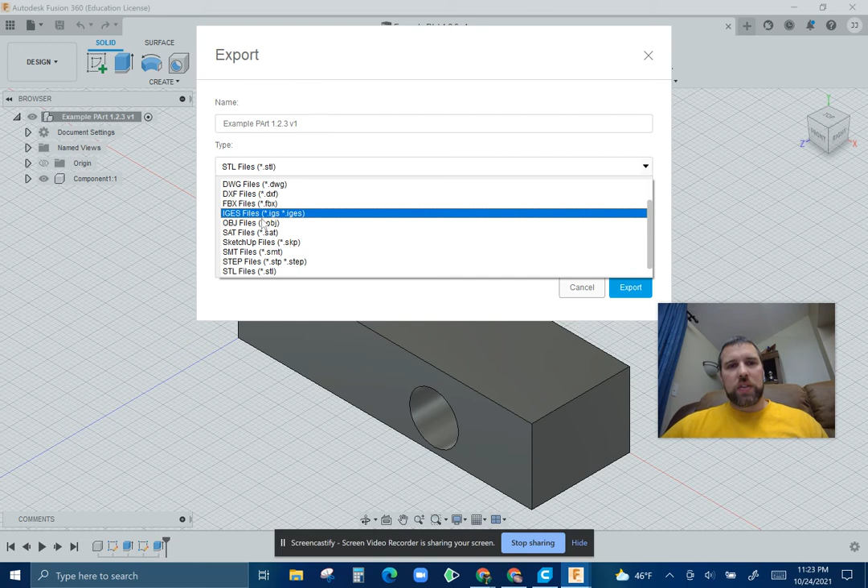So a couple options. You can export as an STL file, stereolithographic file, and that'll send that 3D model to any type of slicer you want. Or you can 3D print the part, basically send it to a 3D printer. And since we have Cura installed on the desktop, I think we can send it straight there.

So either way you do it, it's going to ask me to select the part. This is the part I'm going to select. We're going to export it in millimeters. Refinement is medium, that's fine. And the print utility is Cura.

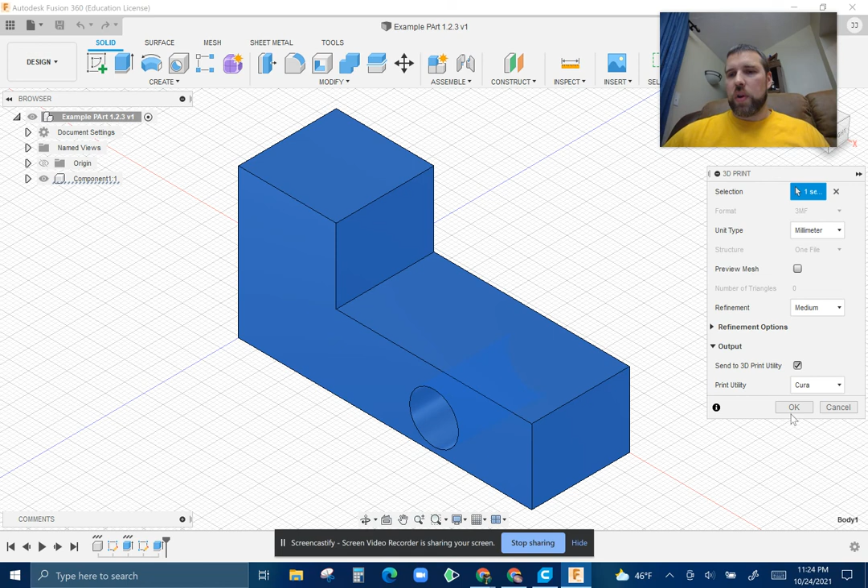So it recognized that right here. I'm not sure if it recognized it because I have Cura installed and it knew that, or if that comes as a preset, but that's the one we're going to send it to. This is going to be smart enough to open Cura itself to send the part over. It's going to think about that for a moment. But if you did the STL route, that's totally fine too.

In Cura, you can go to the little file folder over here and click on that. Well, it's thinking, not responding. Oh, probably because Fusion's still talking to it and doing its thing.

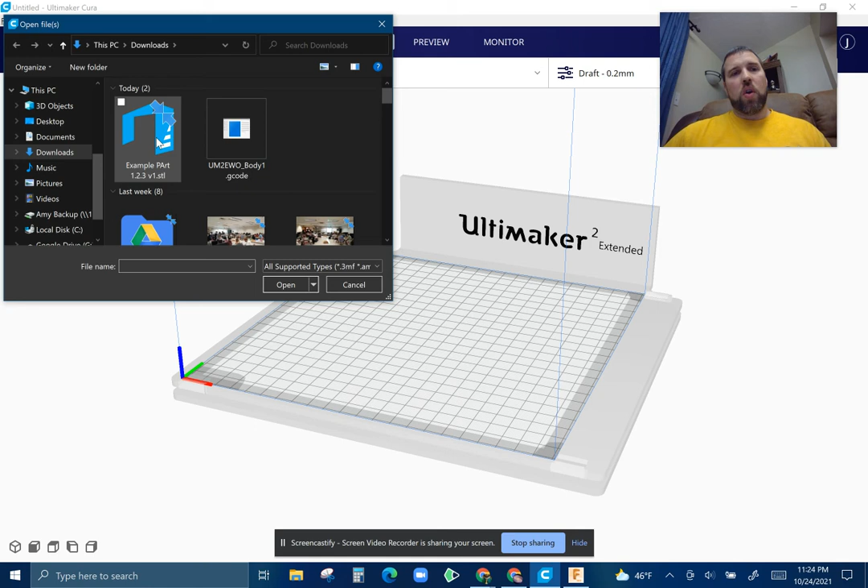There we go, and you can open up an example part right there. There's my STL file that I exported. But it opened up a separate one already, so Fusion talked to the Ultimaker, and we're good to go.

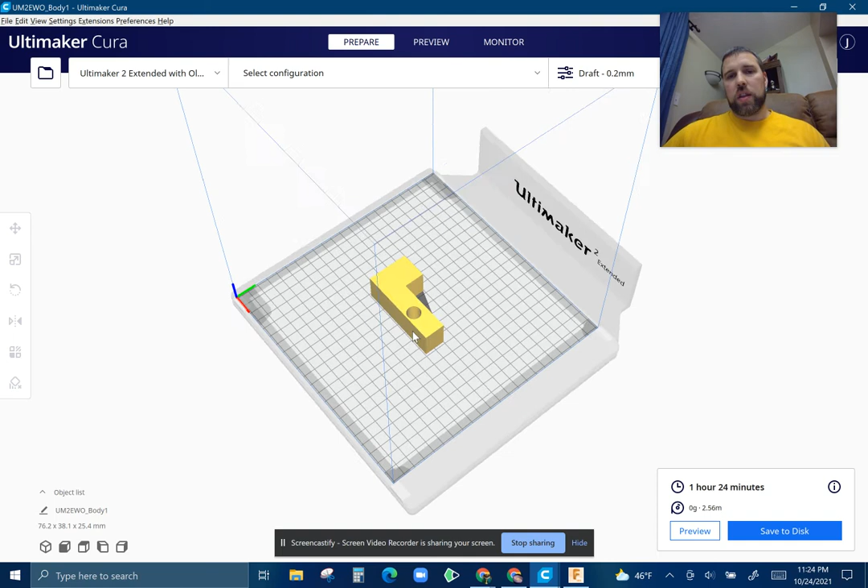So a couple things: center wheel will grab and pan and move over. Right click will orbit around so you can look at the different parts. Over here on the left, you have some tools if you select the part itself.

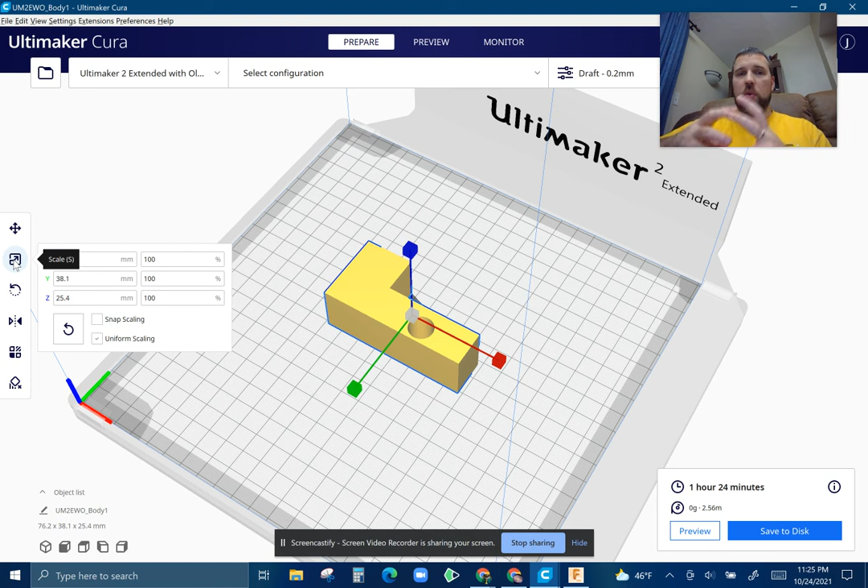First one up is just moving it. You can either grab the arrows or input actual values here to move it around. Second one is scale. If you needed to scale this up or down via percentage, you can add that here. Otherwise, it'll come in with the same dimensions that you made in the actual file.

This is an important one, the rotation. It gives you kind of 3 orbits to rotate this around. A lay flat button, so that if you do tilt it, you can use lay flat so it brings it back down onto the build plate flat and doesn't do one of these things.

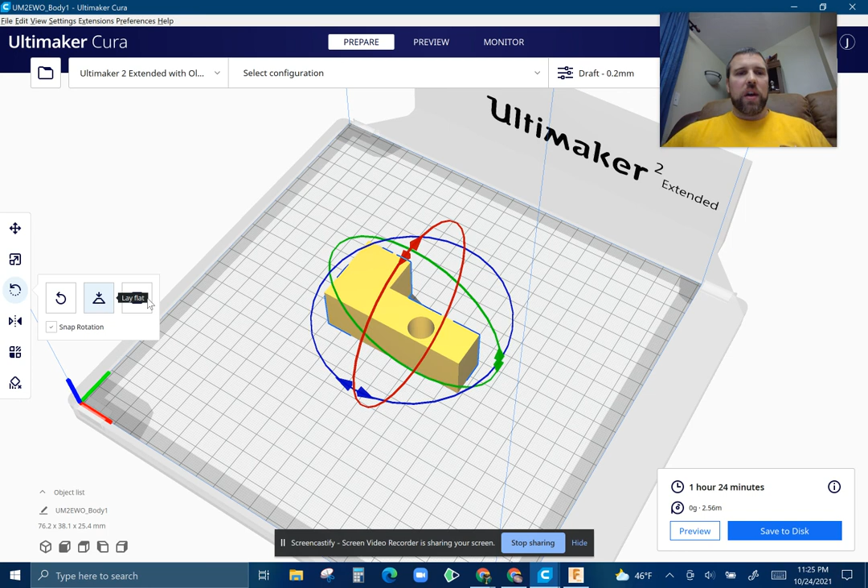But this is the one I want to show you, the select face to align to build plate. It doesn't always choose the right face. Sometimes we come in like this, which is how we modeled the part. That's how we want to look at it. We want to think through what it's actually going to do.

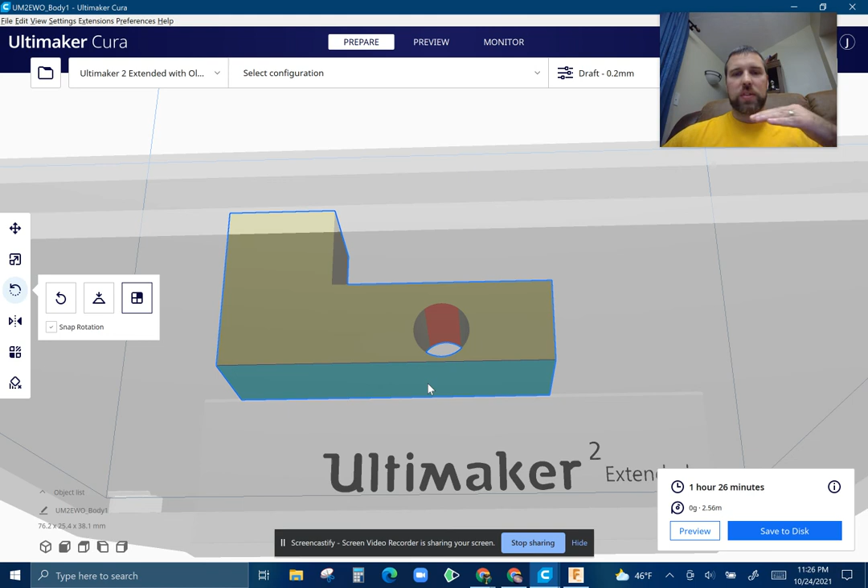If you see that little red spot right there, the teal tells me that's flat on the build plate, so it's happy. But the red doesn't have enough support, basically meaning the print head is going to come over to this section and not have anything to print on.

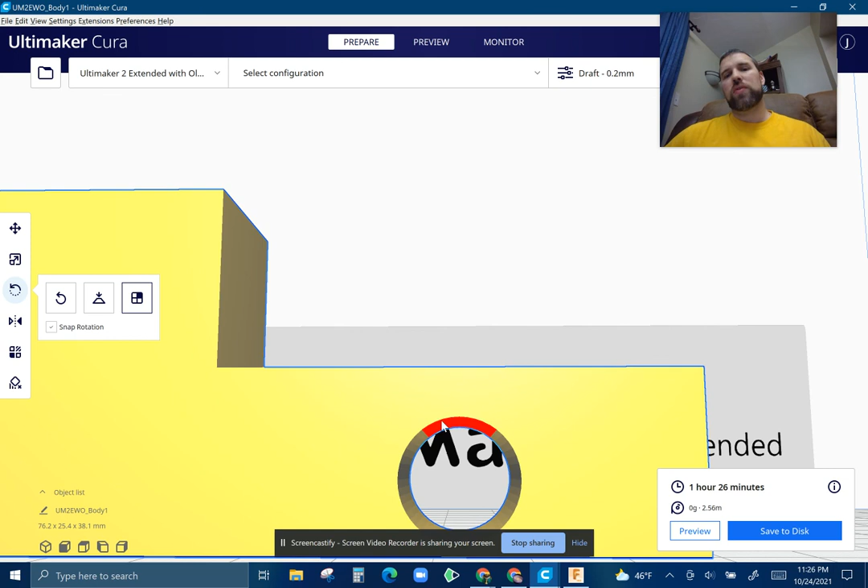Now you can get away with a little bit of curvature. If you zoom in here, again the scroll wheel will do that for you. If you zoom into that section, you get a little bit of overhang here that it can handle. But once you get too far, it's telling you, hey, I can't, I need support to add that onto.

So you have a couple options. You can add support here in the settings, you can add the support right there. But it's more important to choose: is this the right face to build on? So you have a couple options - select face to build on.

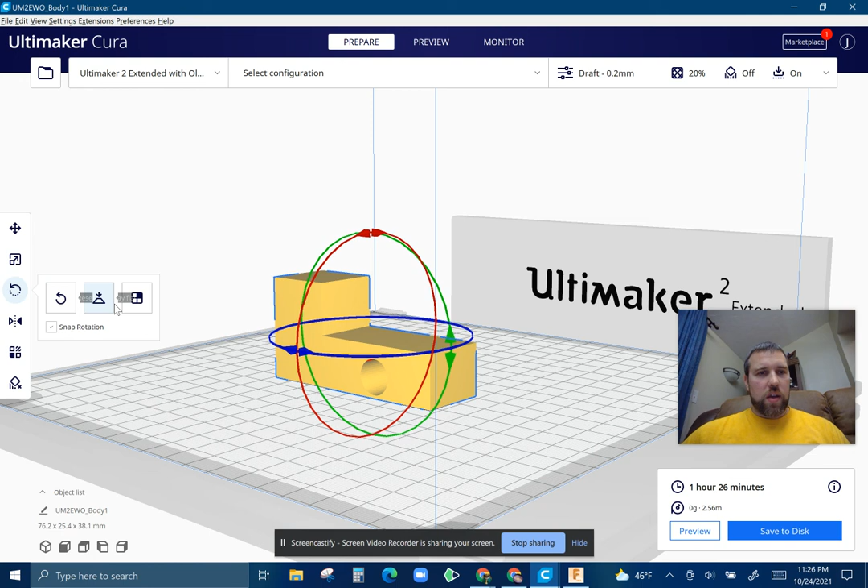If I choose this one, it's standing up. That's definitely not a good idea because now I have more parts overhanging. I want to avoid the overhang. But if I choose this face, now I don't have any overhang, and it's going to build right up. So I don't need any support for that one. That's kind of the best choice, the most economical choice for this one.

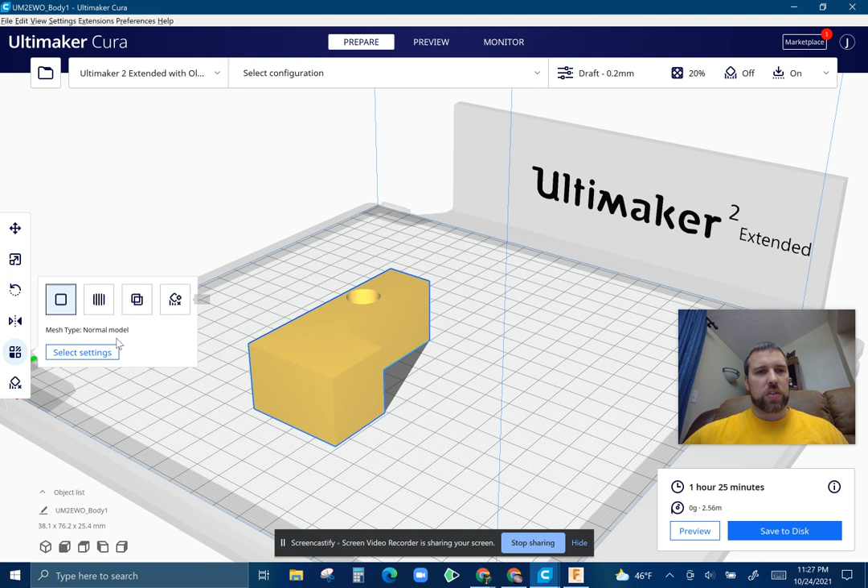So after that, there are some mirroring options, some duplicating options, some mesh types that we're really not going to get into and worry about. So mostly focus on selecting the right face to build on so you have the least amount of supports.

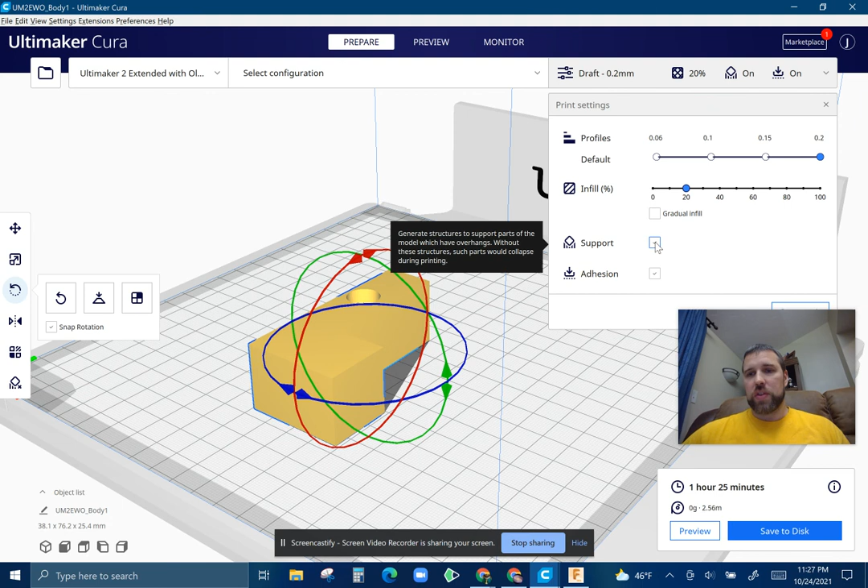And when you do need supports, you go over here and choose support from this menu, and adhesion if you need to. This thing doesn't need any supports, so I'm going to turn that off. Adhesion is always a good idea because that takes this outer side - I went over to the preview tab over here - and adds a little brim around the outside. It helps it hold onto the build plate, makes sure it doesn't scoot.